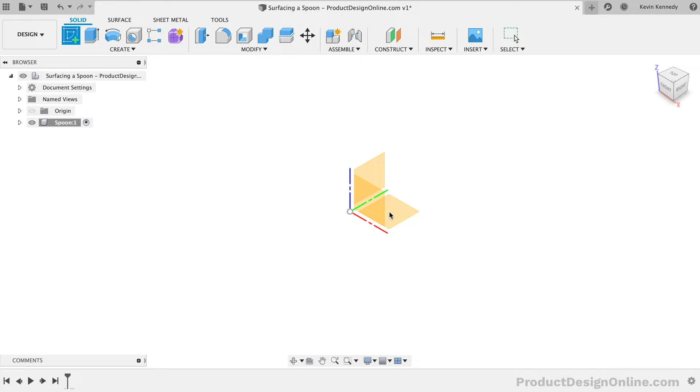I've gone ahead and saved the file and created a component for the spoon. To start, we'll want to sketch out the top profile of a spoon. We'll then use the top profile as a reference when creating the side profile and the other geometry required to surface the spoon.

I'll first create a construction line 190 millimeters in length. This line will serve as the spoon's center line, allowing us to mirror the geometry.

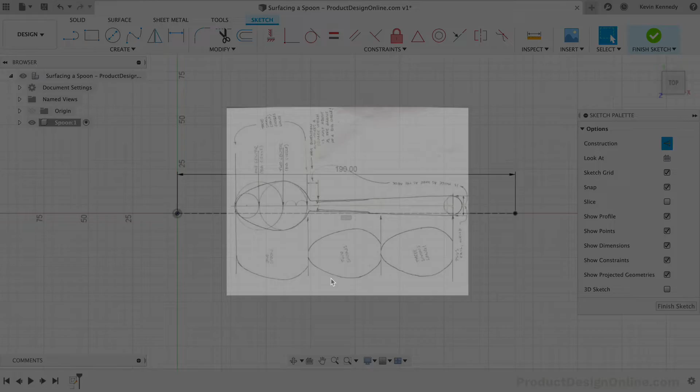You'll then find that we can make up a standard spoon shape using a lot of circles as reference geometry. I'll place this image on this tutorial's resource page, which I've linked to in the video description.

I'll first draw a center circle on the center line, making the diameter 43.2 millimeters.

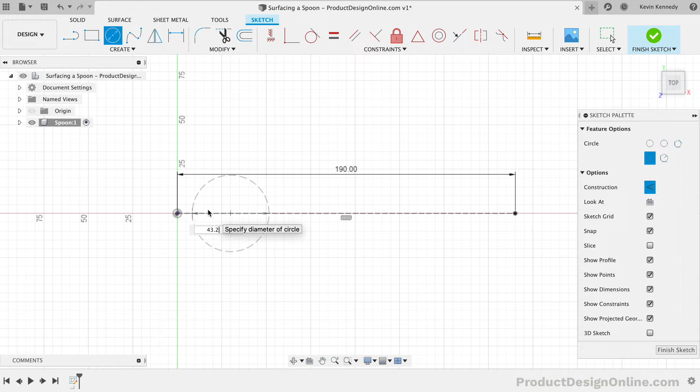For all of these dimensions, I'm referencing some different dimensions that I found online. I'll also include a drawing on the resource page for you to reference.

We'll also want to add a coincident constraint to the circle and the origin point. I'm also going to toggle open the Sketches folder so I can keep an eye on that fully constrained lock icon.

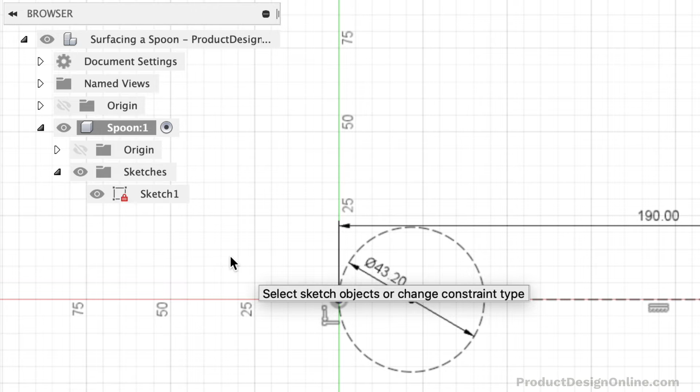Next, we need a second circle starting at the edge of the first circle. Since this circle will be the same size, we can place the circle and add an equal constraint.

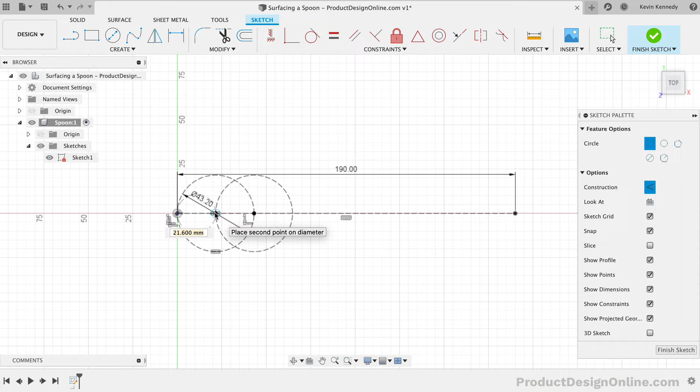We'll also create a 2-point circle within our first circle. This smaller circle will be our reference for the front contour of the spoon. Because we're snapping it to each edge, we won't need to enter a dimension.

We'll also need to draw a fourth circle that touches the large circle on the right. This center circle will have a diameter of 10.8 millimeters. We'll also need to select both of them to add a tangent constraint, making sure that we're still fully constrained.

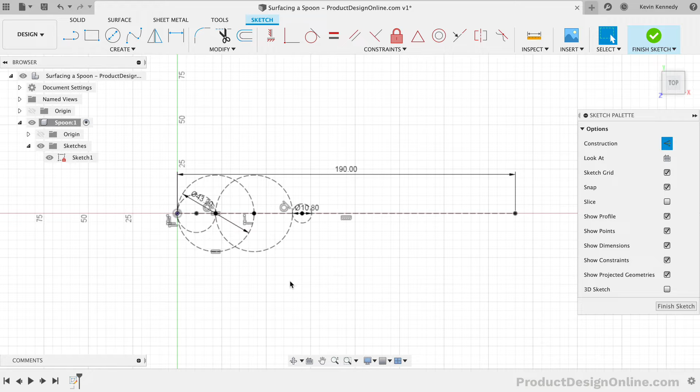Lastly, we'll need one last center circle on the very end of our center line, which will serve as the roundover for the handle. This circle will be 16.8 millimeters in diameter.

I'm then going to use the line tool to connect these last two circles to make the handle shape. We won't need any dimension, but we'll want to make sure that the line is tangent to each circle. We'll utilize the tangent constraint to make sure, and we'll also want to make sure that this is not a construction line, since we'll use these lines for our profile.

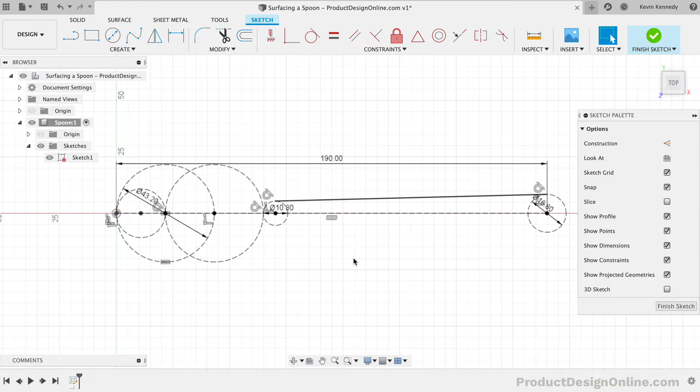To finish off the spoon shape, we'll use the tangent arc command. I'll start where the straight line is for the handle, and I'm going to create 4 different tangent arcs, tracing the construction geometry that we set up.

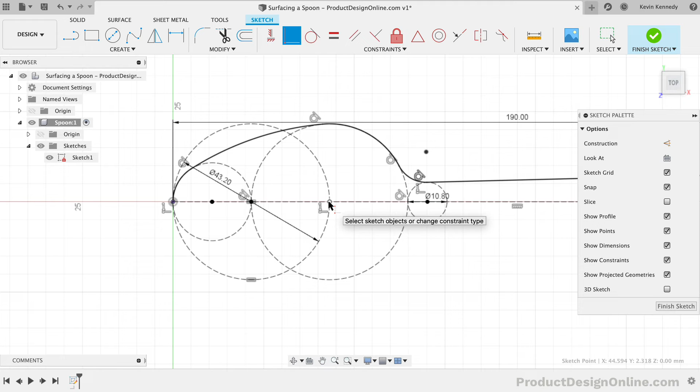Once that is complete, you'll see that we don't yet have this fully constrained. However, you'll notice the arcs have their center point in the middle. We need these to line up with our construction circles. To do this, we'll force them to stay together with a coincident constraint. The sketch should then be fully constrained again. If not, you'll need to make sure you have tangent constraints on all 4 of the arc segments.

We now have half the spoon shape, so we can mirror the geometry over to the other side.

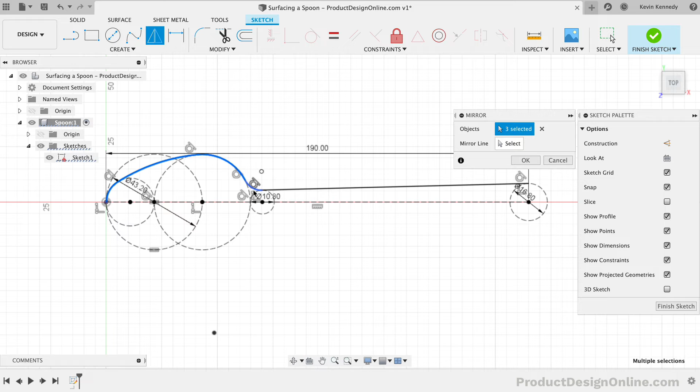We'll need to turn the back construction circle into regular geometry. From there, we can use the trim tool to cut away the inner part, which we no longer need.

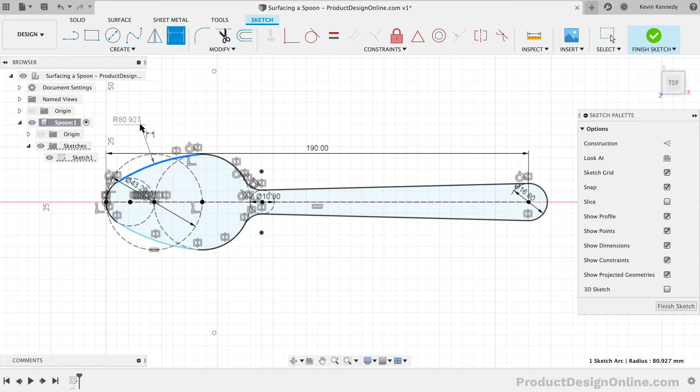You'll see that we also need to fully constrain our sketch by defining the radius of these arcs. I'll apply a sketch dimension and type out a radius of 50 millimeters, which should complete our sketch and ensure that everything is fully constrained.

I'm also going to rename the sketch so I can better reference this later on.

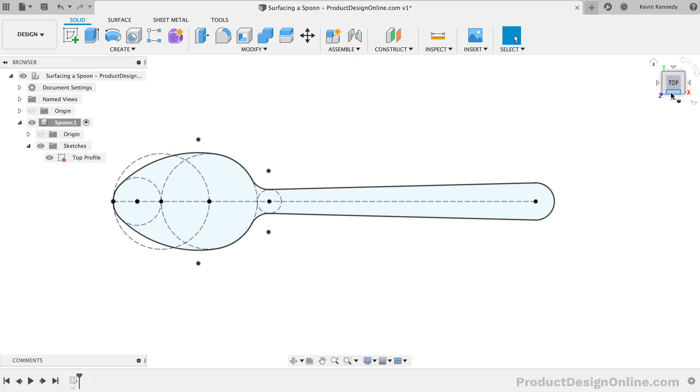At this point, we're ready to create the side profile, and then we'll loft these shapes with the surface tools, followed by trimming away the excess surfaces. For the side profile, we can sketch on the XZ origin plane.

To better create our side profile, we'll want to reference the top profile. I'm going to project several of these points and then create construction lines that will serve as a skeleton that we can then reference as we sketch out our shape.

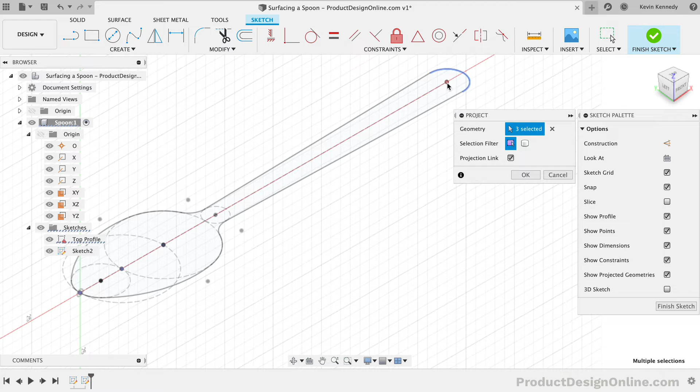We'll want to project the first point of our line, the center point of both large circles, and the center point of the small circle. We'll then use the intersect tool to reference the end of the handle and the two edges of the small circle.

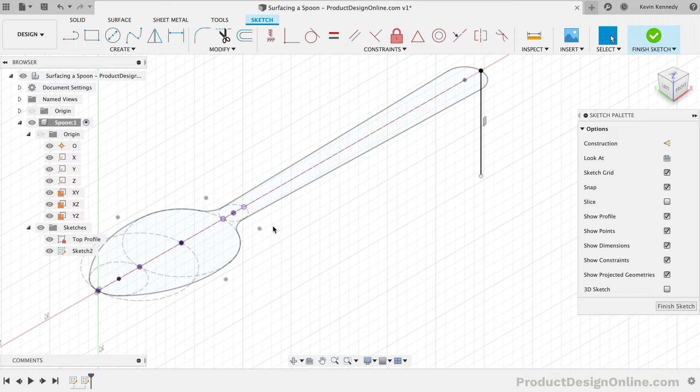I'll then draw 7 vertical lines off of each one of these points. At the moment, we'll just make sure that they snap in vertically.

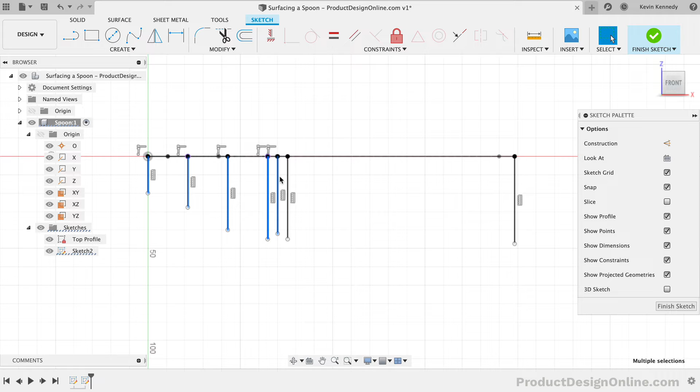Once they're all drawn, we can select all of them and turn them into construction lines. I'll also select the equal constraint in the toolbar, forcing them to be the same size. This will simply make it easier for us to fully constrain this sketch.

I'll then add a dimension of 100 millimeters to the front construction line. However, you'll have to keep an eye out on the construction lines. Sometimes their endpoints don't get constrained, which keeps the sketch from being fully constrained. If this happens, we can try re-adding an equal constraint to the line itself, or you can add a constraint to the endpoint.

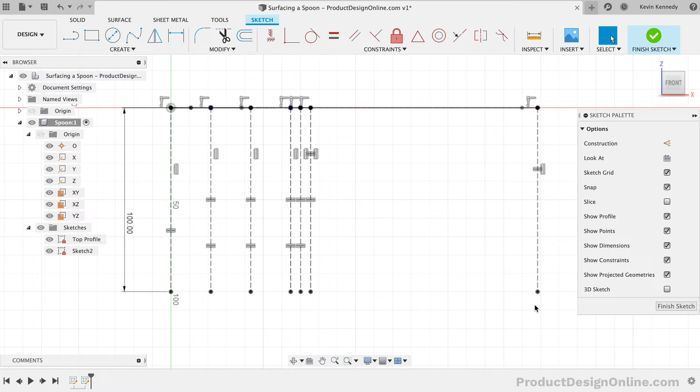I'll now draw a straight line connecting the two construction lines on the right, making this line at an angle, which will serve as the spoon's handle. We'll eventually define the angle. To create the bent part of the handle, I'll use the tangent arc tool.

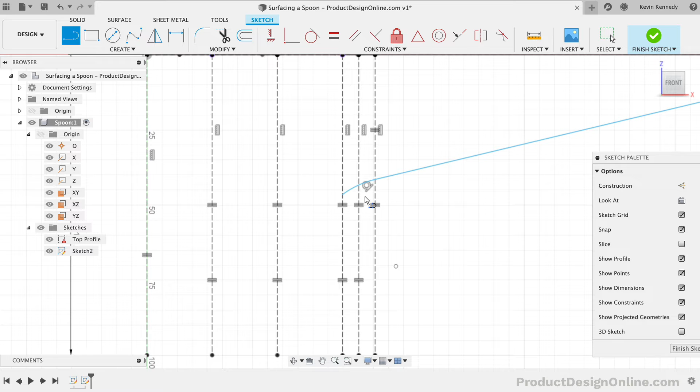Starting with the straight line, I'll head 2 lines over and we'll just place the arc for now. I'll then draw a construction line straight over to the left, running to the front. This will represent the top lip of the spoon.

At this point, we have enough geometry to add the dimensions of our handle. I'll first dimension the tangent arc, making it 6 millimeters in height from one point to another. We can also add a sketch dimension from the construction line to our straight line for the handle.

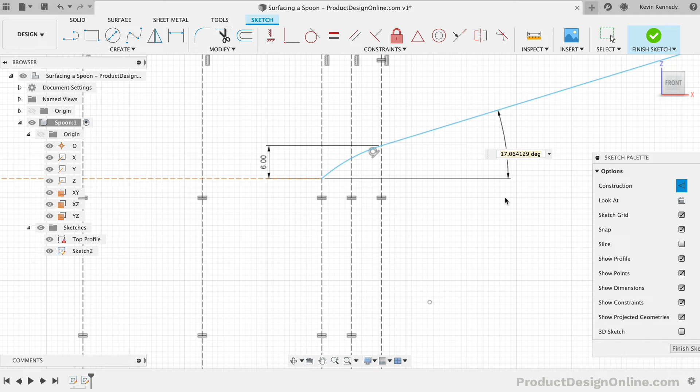Dragging over to the right will let us define the angle. Most spoon handles are between 10 and 20 degrees. Let's try somewhere right in the middle by using 15 degrees.

We can also add a coincident constraint to the top of our handle and the end of our first sketch, which will make all of this constrained.

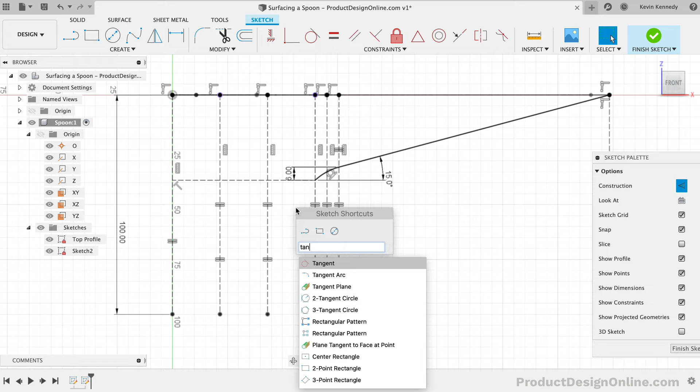We'll need to use the tangent arc again to finish off our side profile. I'll start at the handle since we already have a tangent arc. This will help ensure that each segment is tangent to one another.

We'll click one line over to create the first segment, and then we can connect the second arc to the front of our spoon. To make this fully constrained again, we'll need to add a dimension to one of these arcs. I'll add a dimension of 110 for the arc radius.

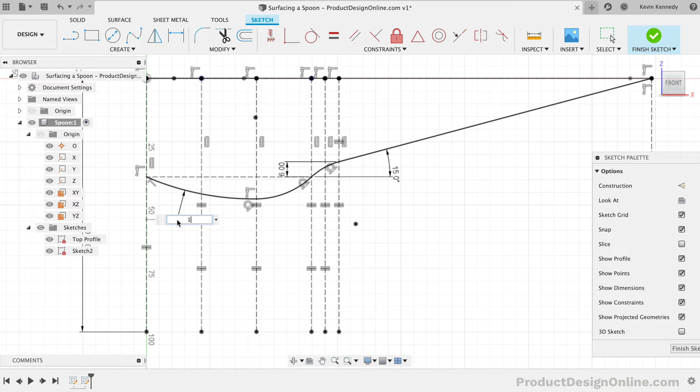Again, I've placed these dimensions on this tutorial's resource page if you need to reference them. We can now finish the sketch.

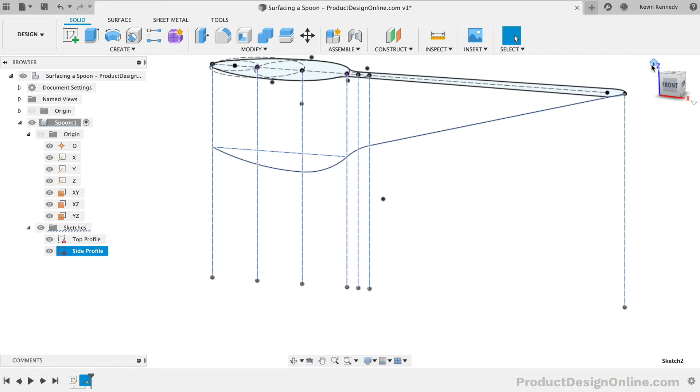At this point, we're ready to reference our top profile sketch so we can define a little bit more of the spoon contour before we go to use the surface tools. I want the front of our spoon profile shape to be placed at the appropriate location with the side profile.

To do this, we can create a plane at an angle on this top construction line. After creating a new sketch on the plane, we'll be able to start projecting the sketch geometry using the project command. I'm only going to project the outer contour of the spoon, including the construction circle.

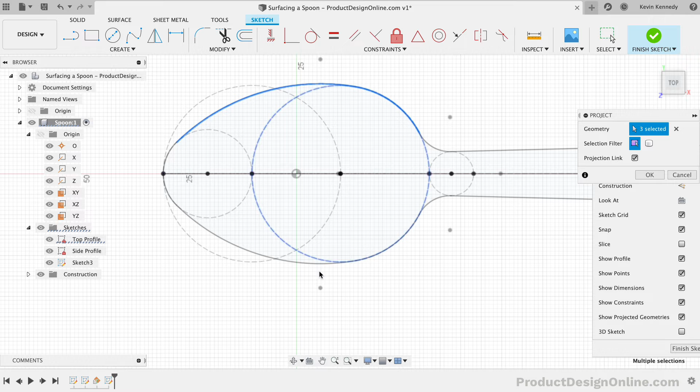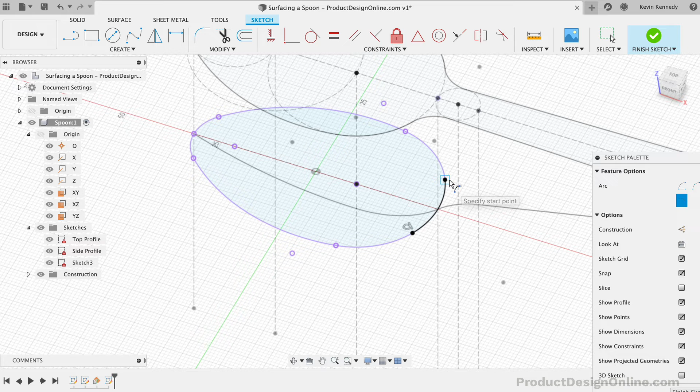We want this to be a closed profile shape, so we'll instead delete the circle and we can close off the shape using the tangent arc tool. We can then stop this sketch and rename it in the browser.

We're now ready to create a sketch on the second and third construction lines so we can define the spoon's concave shape.

Again, we can use plane at an angle and we can type out 90 degrees to rotate the plane to the correct orientation.

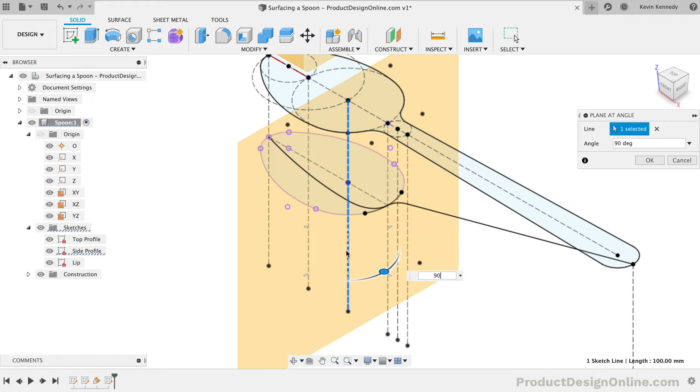After creating a sketch, we'll want to intersect the point where the side profile meets the sketch. And we'll also intersect the 2 points where the lip of the spoon intersects.

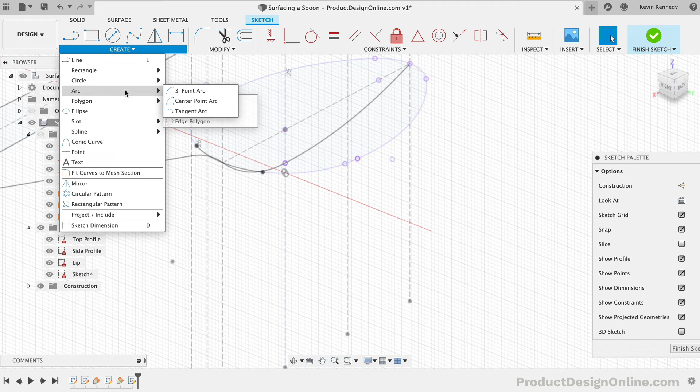This will allow us to reference that point with a 3-point arc command. Remember to keep an eye on your sketches in the browser to make sure they're getting fully constrained, as well as renaming them.

Following the same procedures, I'll complete the 3-point arc for the next construction line.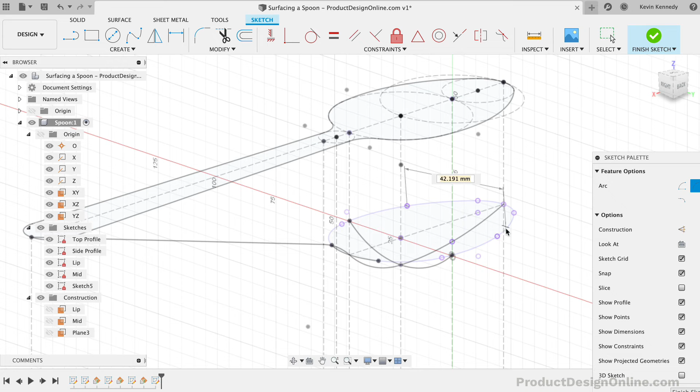We'll now be able to use the surface tools to finish off the shape. Remember, all of the surface tools are in the Surface tab and have an orange icon. I'll activate the Patch command.

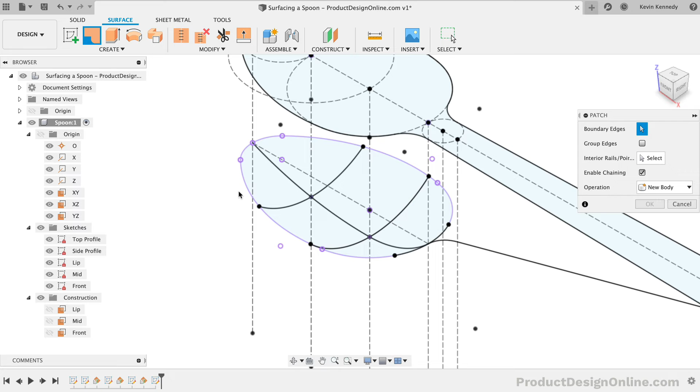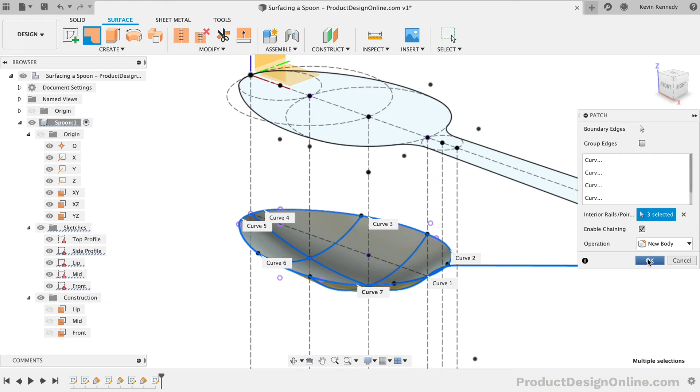With the Patch command, we'll first need to select all the way around the lip profile. For the interior rails, we can then select the 2 rails that we just sketched out along with our side rail. Once we click OK, you'll see that our sketches are hidden.

We'll need to turn them back on so we can reference them for the handle. We'll first need to create a straight line at the back of the handle, which will allow us to surface loft the handle.

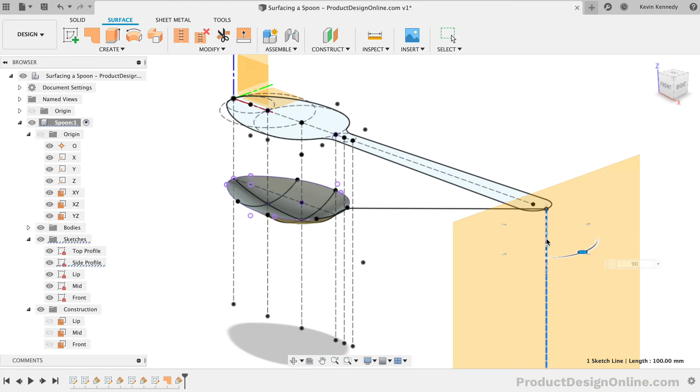I'll create another plane at an angle on the handle construction line, again making it at 90 degrees. For this sketch, we'll want to project the 2 points of the handle's circle. We'll then connect the dots with the line tool. Once complete, we can finish the sketch and rename the sketch and construction plane.

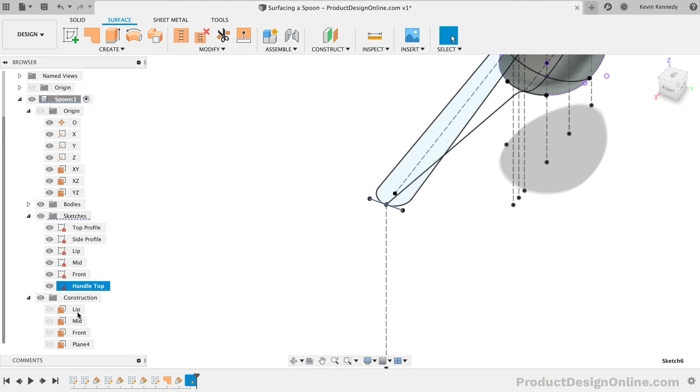Lastly, we'll want to create one more plane at an angle on our construction line where the handle bend starts. This will help us loft the handle while keeping it flat. After creating a sketch, we'll want to project the handle's straight line.

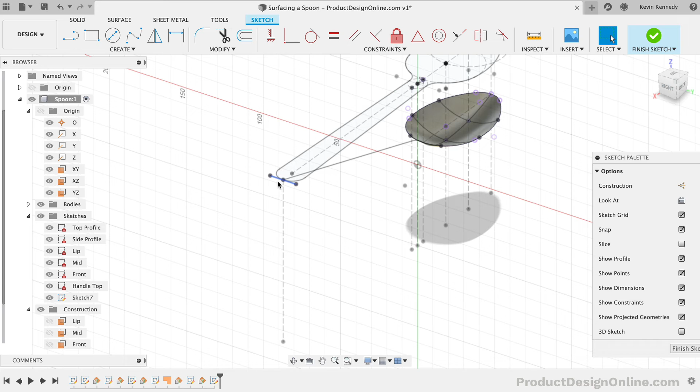The reason I'm projecting this is so we can reference it and keep this line the same width. We can intersect the side profile, which will give us a point to snap the line to. However, I'm going to draw a line off in space and then I'll add a midpoint constraint.

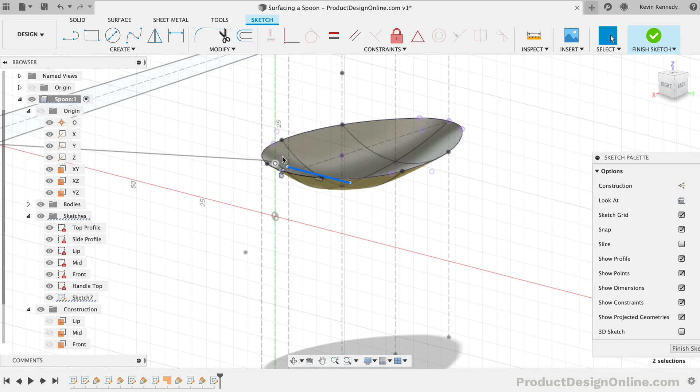I'll then add an equal constraint to this line and the projected line above. Again, I wanted to make this the same size as the back of the handle, which helps us avoid any twist in the loft. We'll then surface trim away the excess.

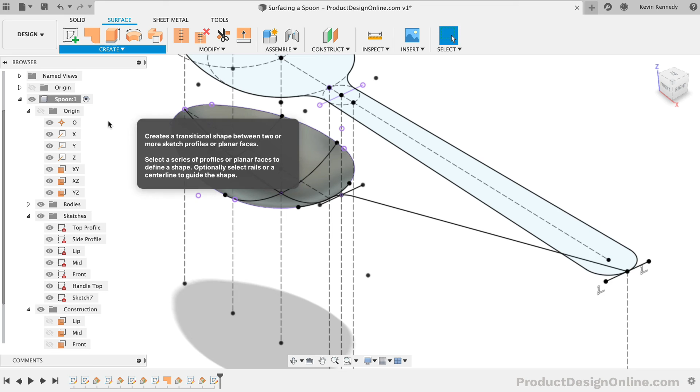Activating the surface loft command, we can loft from the end of the handle to the front of the handle, and then to the upper lip of the spoon.

Notice how the loft is a little bit funky at the moment. We'll want to switch our rail selector to the centerline option. This will let us choose our centerline, which should fix it.

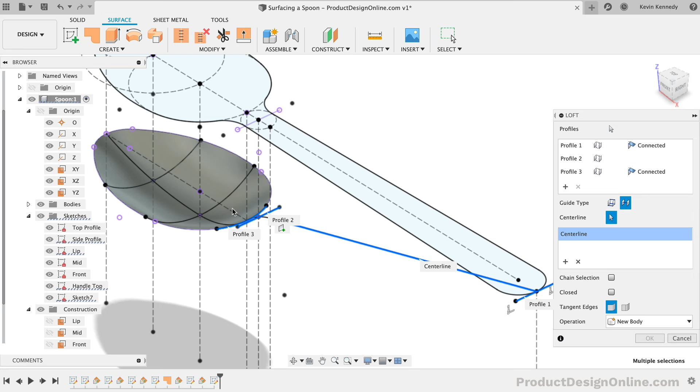After clicking OK, we'll be able to hide our sketches. You'll also see that we have 2 surface bodies in the browser. Now, if the colors don't match, then you'll need to use the reverse normal feature to flip them.

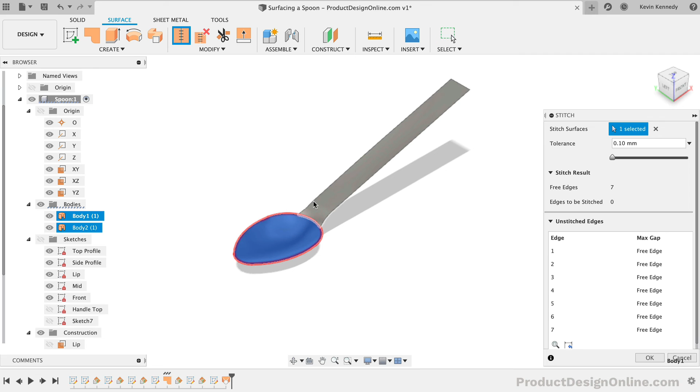We'll then want to stitch these together before we trim the rest of the shape. After stitching both of the bodies, you'll see that we only have 1 surface body in the browser.

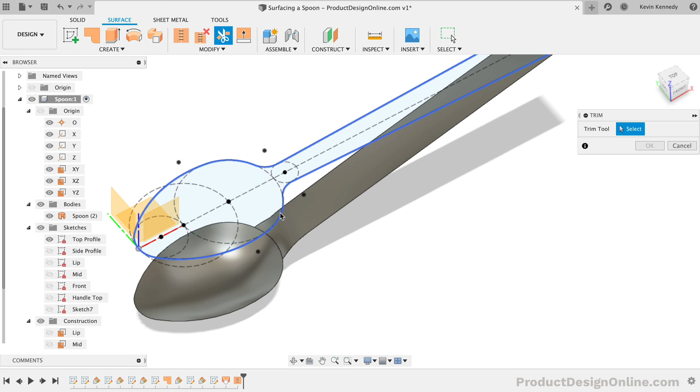At this point, we'll turn the top profile sketch back on as we'll use that to trim the handle. With the surface trim tool, we can select the sketch profile and then the outer surfaces. Notice how they turned red, signifying they'll be trimmed away.

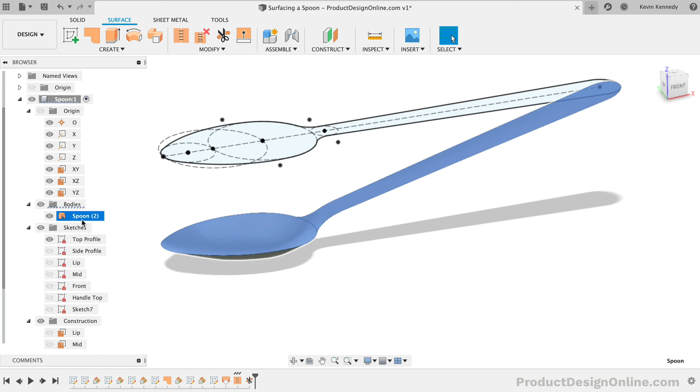One important note, if your top profile is not continuous, then you may need to use the trim feature on each side. Lastly, we can select the body in the browser and use the Thicken tool to turn this into a solid body.

To summarize this surfacing approach, you'll find that creating a top profile of your object will help you create side profiles or other reference geometry. With this additional reference geometry and our fully constrained sketches, we'll be able to control the spoon in a predictable manner.

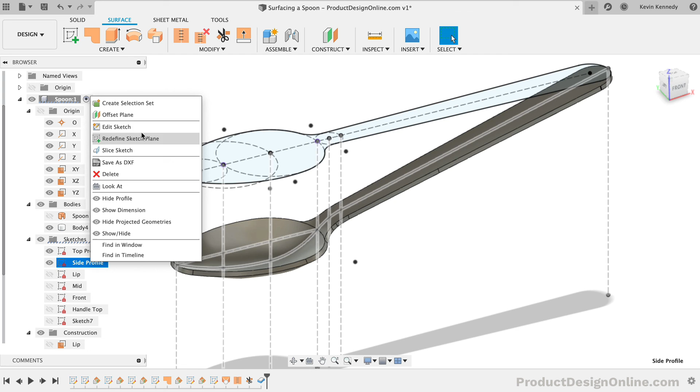For example, we could change the angle of the handle or the radius of the spoon to make the spoon a bit deeper. You'll see after finishing the sketch, everything adapts and updates accordingly.

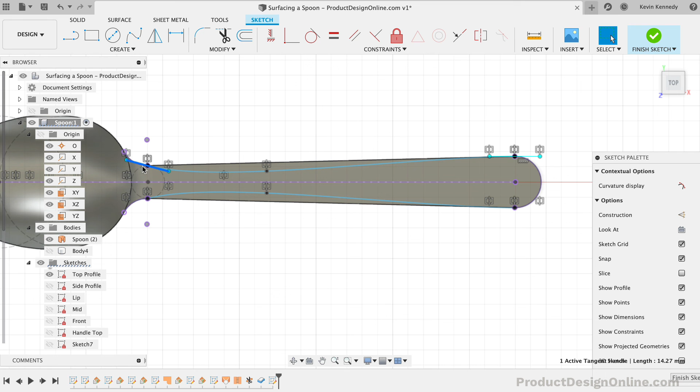Another advantage of this approach is that we can now create additional contour on the top profile if you want to make a more unique handle. Simply add additional sketch geometry and trim away the excess surface. Of course, you'll also want to smooth the edges with a fillet.